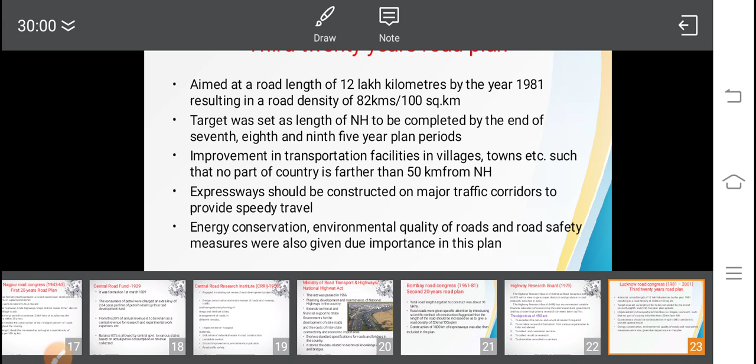Next one will be third 20-year road developmental plan, which was aimed at target of total road length of 12 lakh kilometers by the year 1981, resulting in a road density of 82 kilometers per 100 square kilometer area. Whereas the Bombay road plan, it was 32 kilometers per 100 square kilometer area, and lowest was 16 kilometer per 100 square kilometer area. Target was set as length of national highway to be completed by the end of 7th, 8th and 9th 5-year plan periods.

Further, during this plan period, improvement in transportation facilities in villages, towns, cities, etc., such that no part of the country is farther than 50 km from national highway. You take any city or village, it should not be more than 50 km to the adjacent national highway. In such a way, the road development should be done. That was the discussion made during that committee.

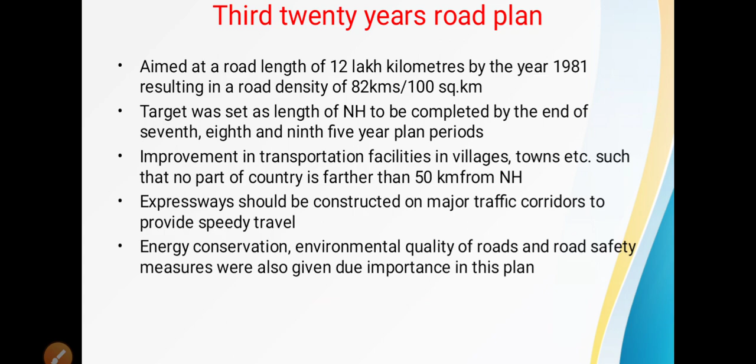Expressways should be constructed on major traffic corridors to provide speedy travel. Energy conservation, environmental quality of roads, and road safety measures were also given due importance in this plan. Next, basis of different formulae.

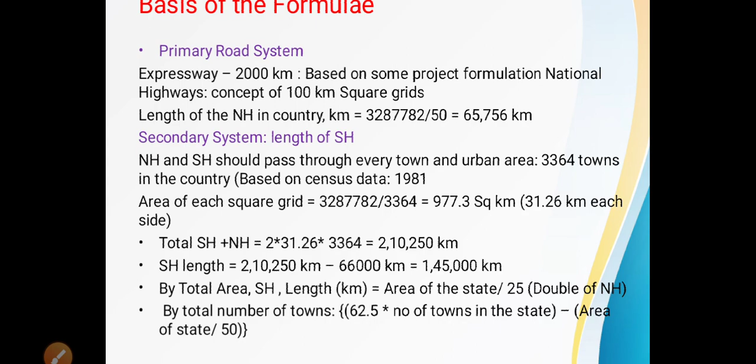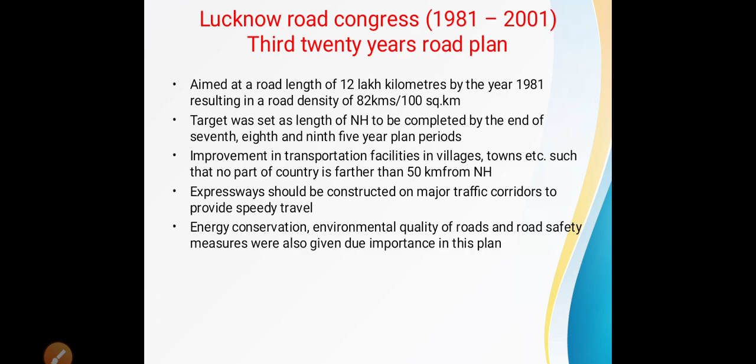Third road developmental plan has classified the roads into three systems: primary system, secondary system, and tertiary system. Primary system includes expressways and national highways. Secondary system includes state highways and major district roads, whereas tertiary system includes other district roads and village roads. All these roads' length can be determined based on the following formulae and concept.

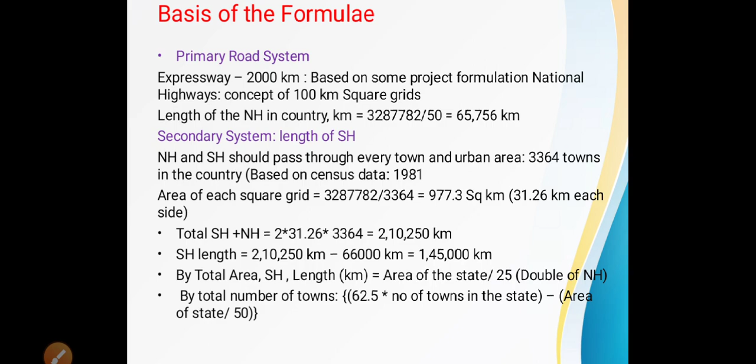Primary system, there is no formula as such. They decided to construct at least about 2000 km based on some project formulation. National highways, concept of 100 km square grids, to carry heavy traffic with high speed. Length of national highway in the country in kilometer shall be equal to total area of the country divided by 50, because it is based on 100 km square grids, means 100 by 100 divided by 100 plus 100. So that will work out to be 50.

Therefore, total area of the country 3287782 square kilometer divided by 50 will give us 65,756 kilometer. It can be rounded off to 66 thousand kilometers. Secondary system, length of state highway. While determining the total length of state highway for a particular state, it has been decided that the national highway and state highway should pass through each and every town and urban area.

During the census of 1981, based on that data, in our country there were 3,364 towns. Area of each square grid will become equal to total area of the country divided by 3364, which will give us 977.3 square kilometer. That means 31.26 kilometer each side, because you have to take a square root of this. So when you take square root of 977.3,

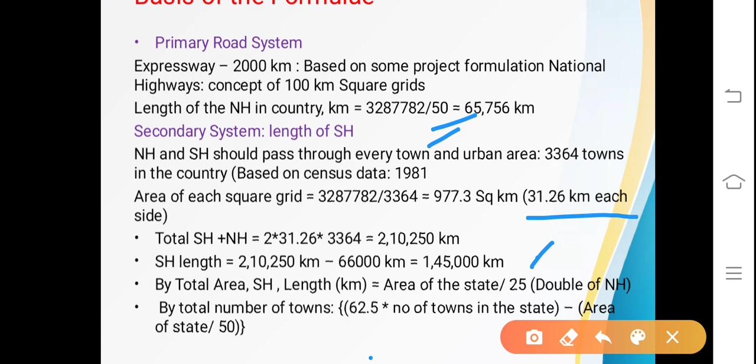Or by total number of towns, length in kilometer is equal to 62.5 multiplied by number of towns in the state minus area of the state divided by 50. Next, in order to determine the length of MDR, ODR and VR, the major district roads for the country is equal to 3 lakh kilometer by total area. Then we will get MDR in kilometer is equal to area of the state divided by 12.5, means this is double of SH or 4 times the national highway.

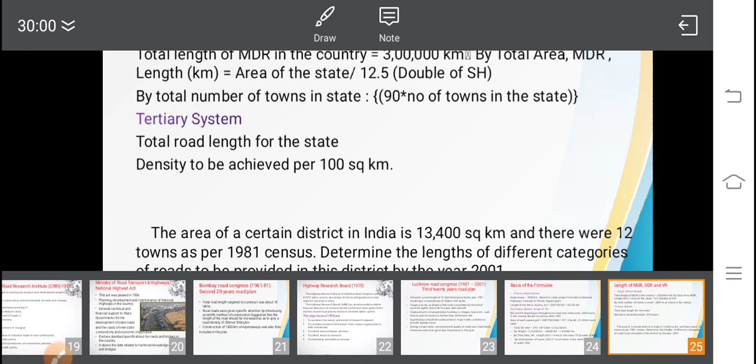By total number of towns in the state, if we calculate MDR, we will get that in kilometer is equal to 90 multiplied by number of towns in the state. Number of towns in whole country is different than number of towns in the state. So we can get the statistics from the statistical department of that particular state for which we are calculating this MDR, and we can work it out.

When we are getting two formulae for SH, then which value should be adopted? Usually the better way is the higher value. Higher value of the above two should be adopted as state highway for that particular state. Now tertiary system, the total road density to be achieved per 100 square kilometer is equal to 82 kilometer.

So based on that concept, total length of all categories of roads you can calculate by the end of 2001. And if you subtract the summation of national highway, state highway and major district road, you will get the total length that is to be constructed for the country, which will be equal to ODR plus VR together. So there is no bifurcation or formula to calculate separately ODR and VR.

However, for the area of that particular district or state, or for the country, ODR may be assigned some value and the rest of the length of road should be developed as village roads, depending upon the judicious judgment by the engineer in charge for that region or location.